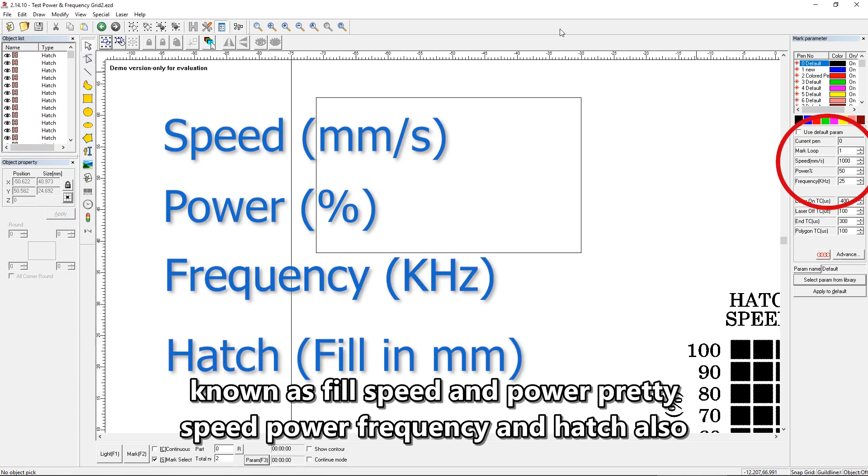When I started with my fiber laser, I found that there are 4 main settings that you want to adjust to control the mark that you're going to make. Those are speed, power, frequency, and hatch, also known as fill. Speed and power are pretty self-explanatory. Probably everybody understands you can go faster or put out more or less power.

Frequency, a little more difficult to understand. Hatch, you can understand that you're going to lay down some lines inside a shape. For example, this rectangle on the screen, we can select it, press the hatch button, put 1 millimeter line spacing, and we're going to fill in this box with a bunch of hash marks. But you can see right through them.

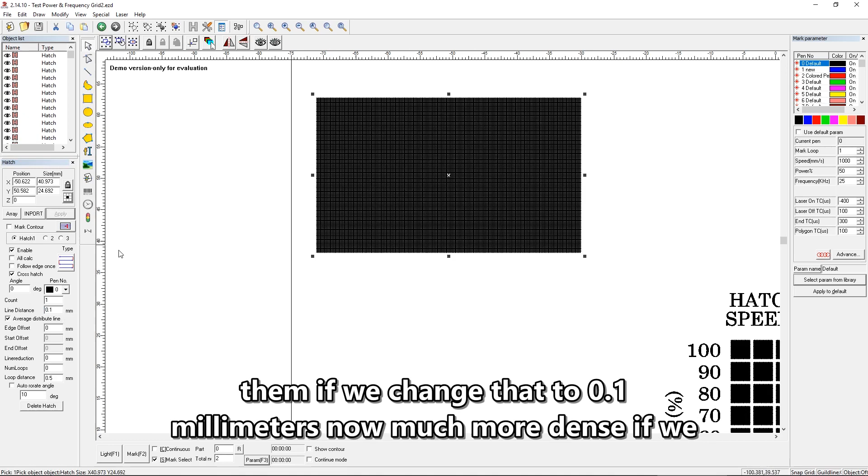If we change that to 0.1 millimeters, now much more dense. If we change the angle of that hatching, now we have a different pattern. So that's pretty self-explanatory too. There's a lot of settings you can do with hatches, but for the most part, you can understand what you're doing. Now on the other hand, the 4th setting, frequency, that's a little more difficult to understand.

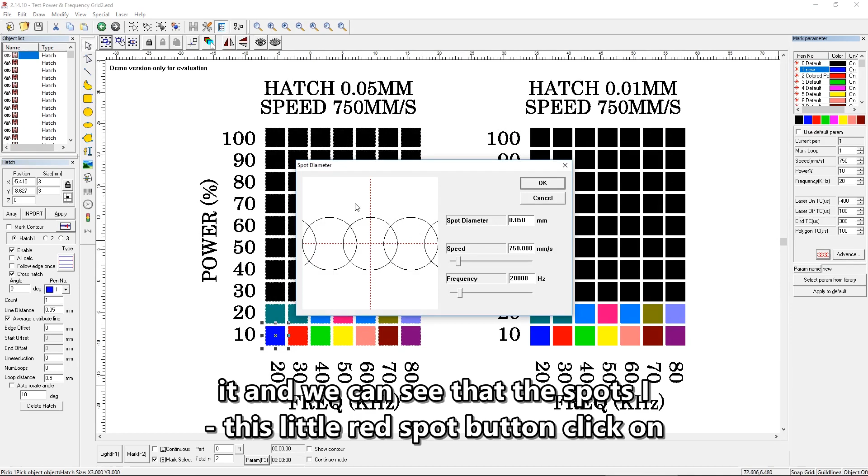We can look to the right side of the screen to this little red spot button, click on it, and we can see that the spot diameter is represented visually by a circle. So we have a frequency slider here as well. It's currently set to 20,000 Hertz. Our range on this laser is 20,000 to 80,000 Hertz.

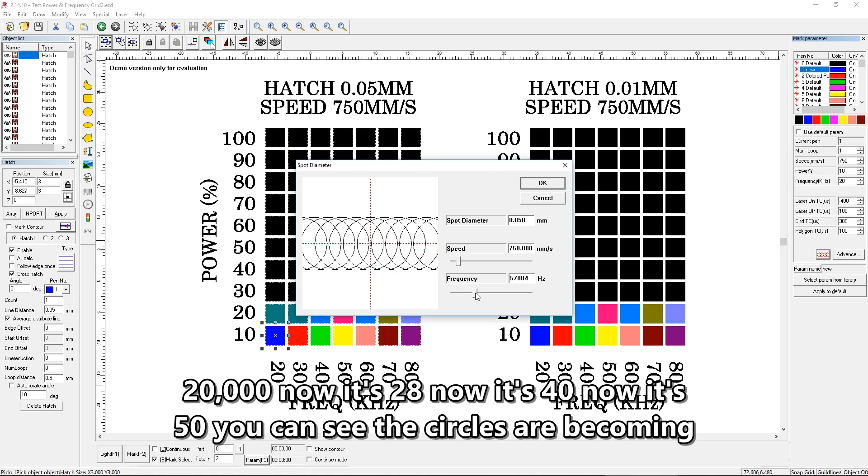So if I slide this, then we're going to see a change in this depiction. So right now, 20,000, now it's 28, now it's 40, now it's 50. You can see the circles are becoming more and more overlapped. So the same amount of power is being delivered. We set the power over in our pen settings. So all this time it's set to 10% right here on the right.

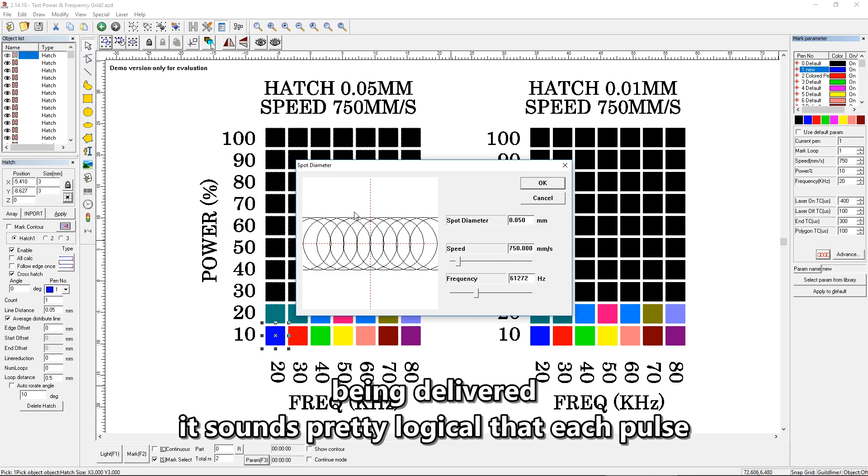So 10% of your laser's power is being distributed amongst all of these pulses. So if you have a lot more pulses and the same amount of power being delivered, it sounds pretty logical that each pulse is going to have a little bit less power in it. Now, if you scroll back and you end up back at 20,000 Hertz, there are fewer, so each pulse will have more power in it. And thus it'll be more destructive and vaporize more material as it hits your workpiece.

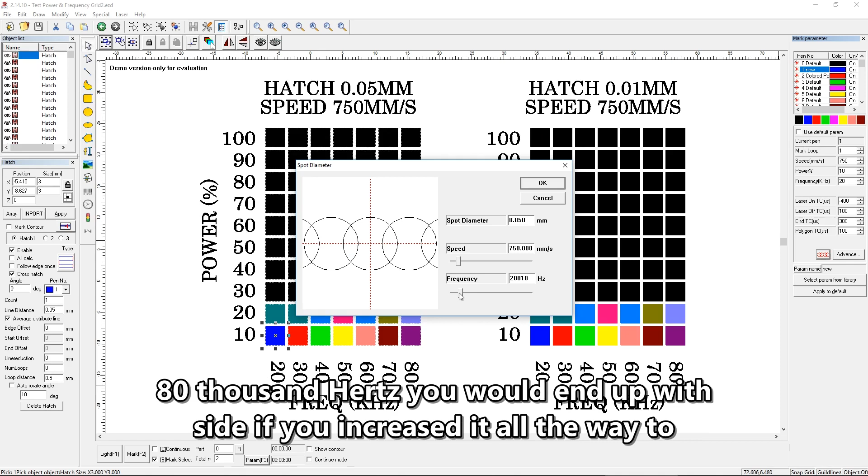On the other side, if you increased it all the way to 80,000 Hertz, you would end up with a lot of pulses, and they'd be much less destructive because they'd have less power in them. And that would result in heating your material more than vaporizing it. And depending on what type of material you're marking, you could end up with a polished finish with that heat, or you could end up with an oxide layer forming, resulting in a black color or another color.

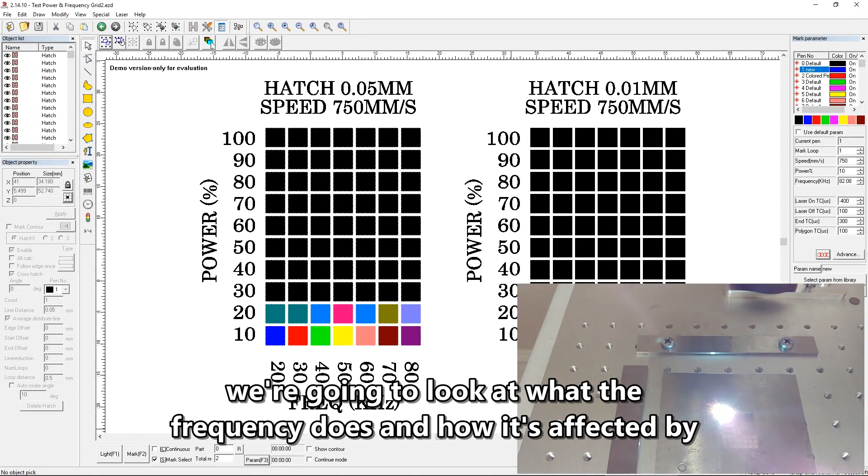So I set up these 2 grids, and all we're going to do is look at changes in frequency against changes in power. So this grid on the left is going to include a hatch spacing of 0.05 millimeters, so relatively tight, and a speed of 750 millimeters per second. The grid on the right, the only change is going to be a tighter hatch spacing. So we're going to look at what the frequency does and how it's affected by hatch spacing. I've marked the first one on the left and the second one on the right, and I'm going to fast forward to the end and let's just look at the result.